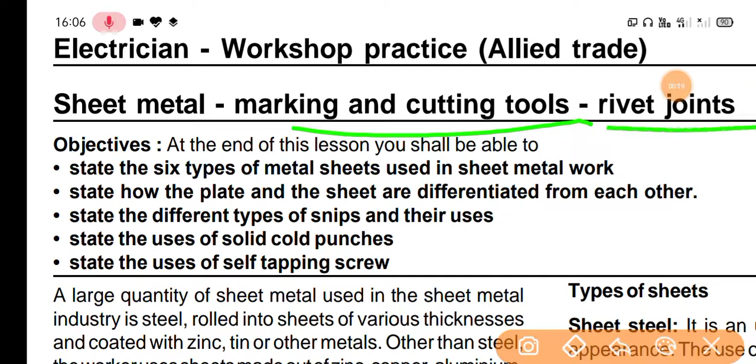A large quantity of sheet metal is used in the sheet metal industry. Steel is rolled into sheets of various thickness and coated with zinc, tin or other metals. Other than steel, the worker uses sheets made of zinc, copper, aluminum, stainless steel, etc.

The term sheet metal generally applies to metals and alloys in sheet rolled into various thicknesses less than 5 mm. Sheets over 5 mm thick are called plates.

Earlier, sheets were specified by standard wire gauge numbers. Each gauge is designated with a definite thickness, as shown in Table 1. The larger the gauge number,

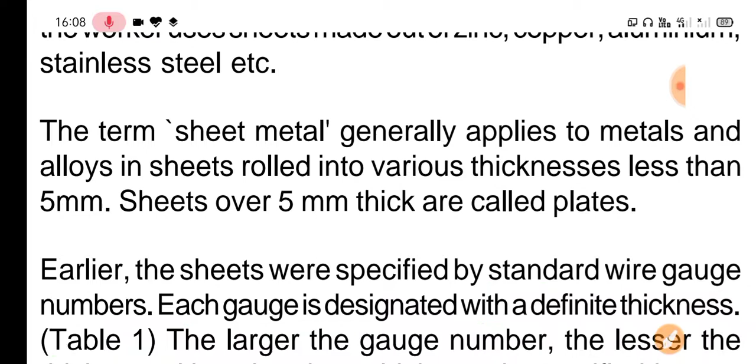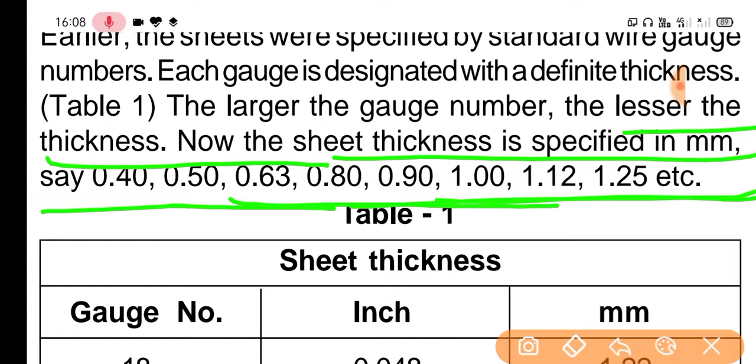the lesser the thickness. Now sheet thickness is specified in mm, for example 0.40, 0.50, 0.63, 0.80, 0.90, 1.00, 1.12, 1.25, etc.

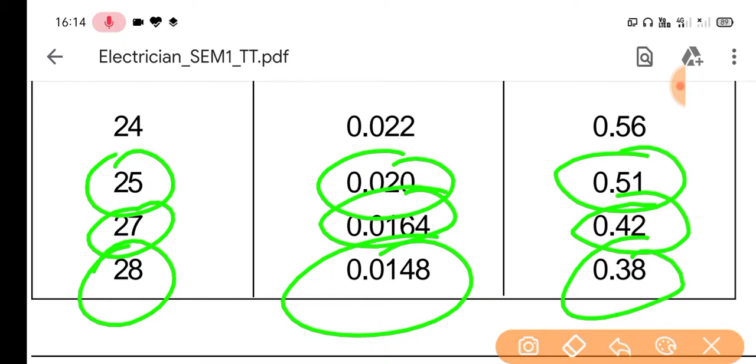Sheet steel is uncoated sheet with a bluish-black appearance. The use of this metal is limited to articles that are to be painted or enameled.

Galvanized iron sheet: the zinc coated iron sheet is known as galvanized iron sheet, popularly known as GI sheet. The zinc coating resists rust. Articles like pans, buckets, furnaces, cabinets are made with GI sheet.

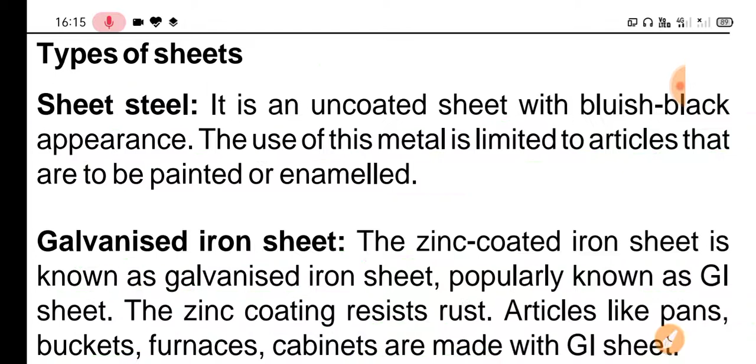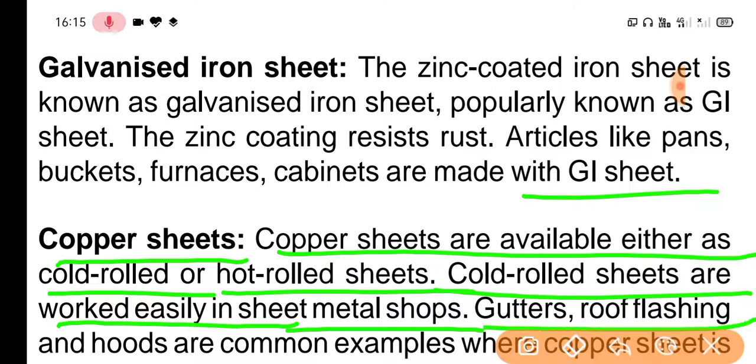Copper sheets are available either as cold rolled or hot rolled sheet. Cold rolled sheets are worked easily in sheet metal shops. Gutters, roof flashings and hoods are common examples where copper sheet is used.

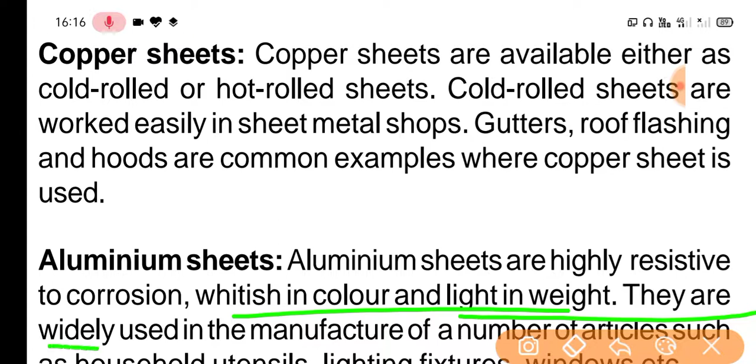Aluminum sheets are highly resistant to corrosion, whitish in color and light in weight. They are widely used in the manufacture of a number of articles such as household utensils, lighting fixtures, windows, etc.

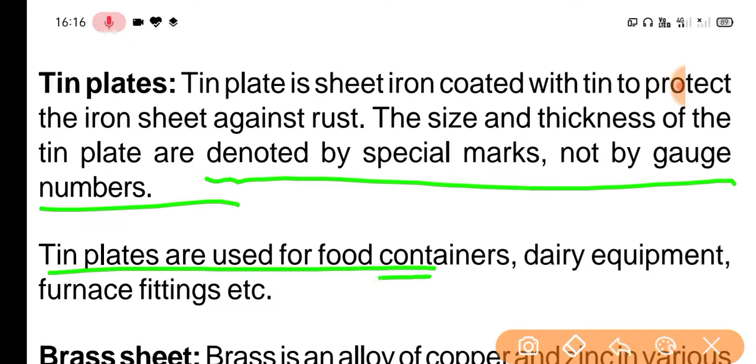Tin plate: the tin plate is sheet iron coated with tin to protect the iron sheet against rust. The size and thickness of the tin plate are denoted by special marks, not by gauge numbers. Tin plates are used for food containers, dairy equipment, furnace fittings, etc.

Brass sheet is an alloy of copper and zinc in various proportions. It will not corrode and is extensively used in craft.

A snip is a cutting tool used for cutting thin sheets of metal. There are two types of snip: straight snips and bent snips.

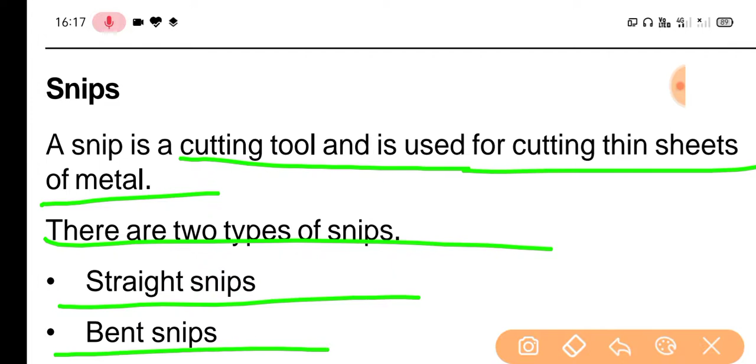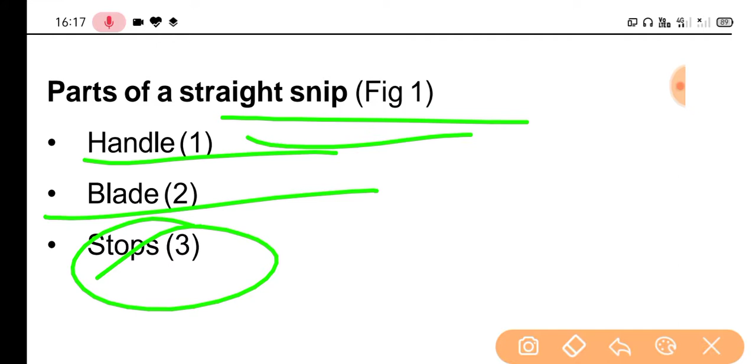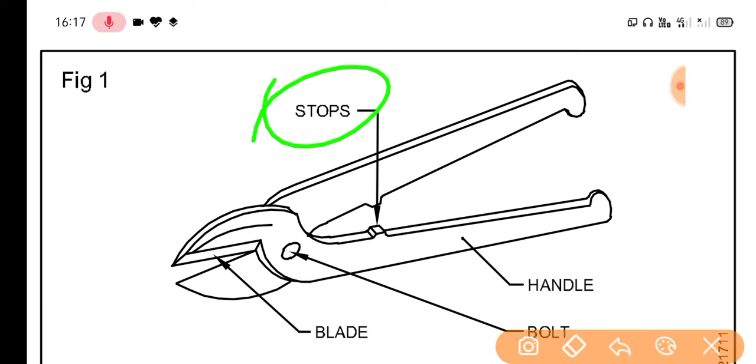Parts of a straight snip: handle, blades, and stop. First the handle, second the blade, and third the stop. As shown in these pictures: the stop part, the blades part, the handle part, and the bolt part.

A straight snip has straight blades for straight line cutting. It can also be used for external curve cuts. As shown in the pictures, this is a straight snip, used for external curve cuts.

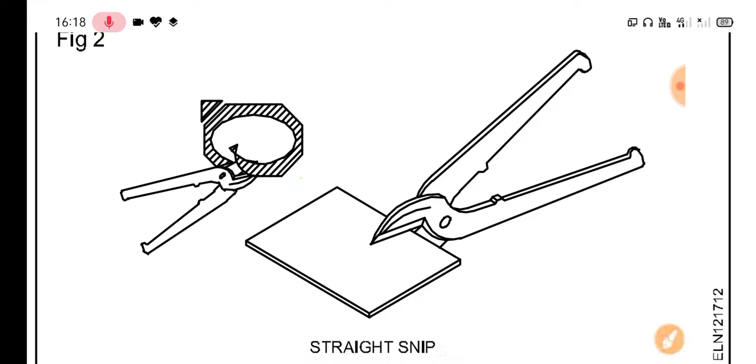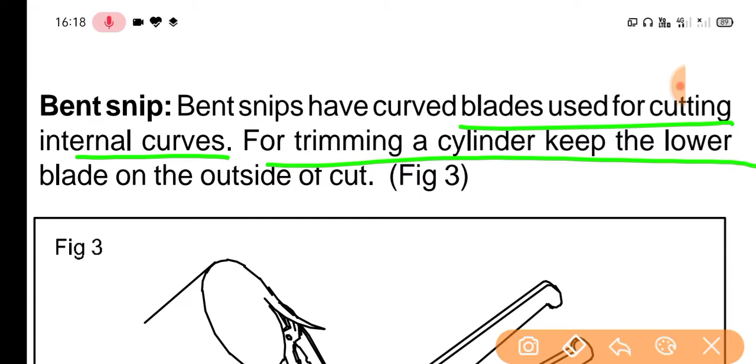A bent snip has curved blades used for cutting internal curves. For trimming a cylinder, keep the lower blade on the outside of the cut. This is the bent snip.

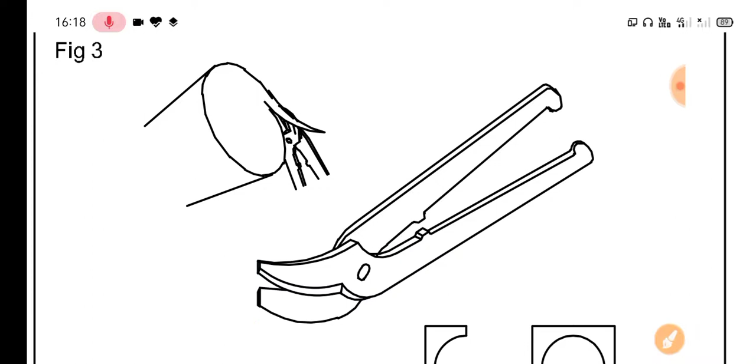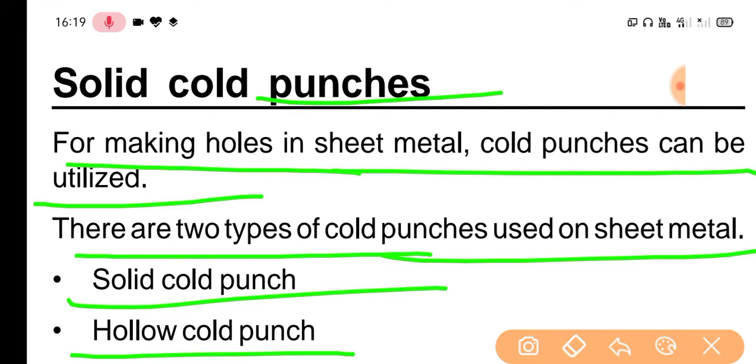Solid punch, or solid cold punch, is used for making holes in sheet metal. Cold punches can be utilized in two types: solid cold punch and hollow cold punch. In this lesson, you learn about solid cold punches.

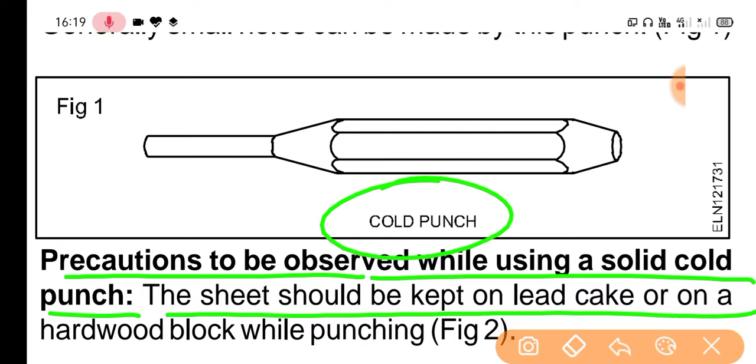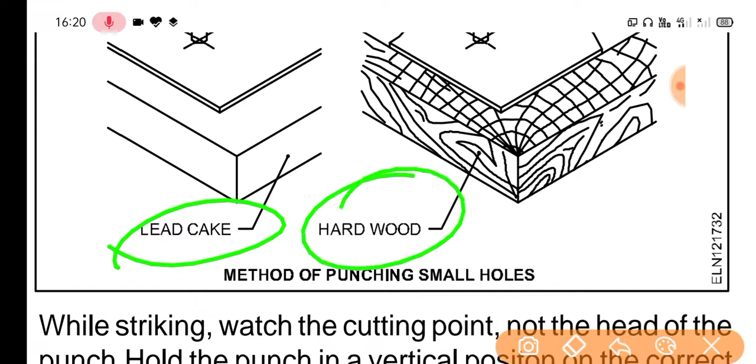Self-tapping screw: a self-tapping screw is used in assembly where thin section metal sheets are used. Joints made using these screws are vibration resistant and can be assembled and dismantled many times.

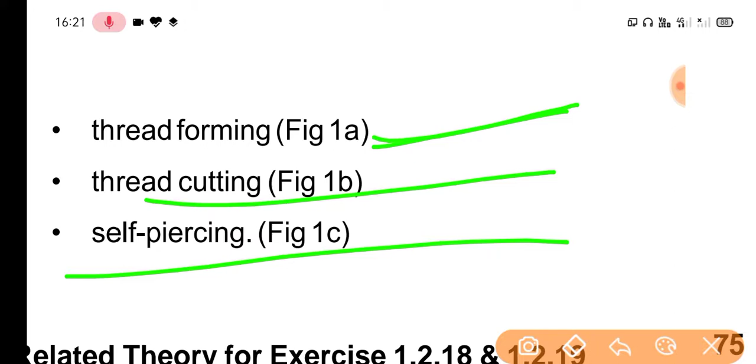Since these screws cut thread in mild steel and soft metal, they are called self-tapping screws. The thread forming type produces the mating thread by displacing the material. These are useful for softer and thinner materials.

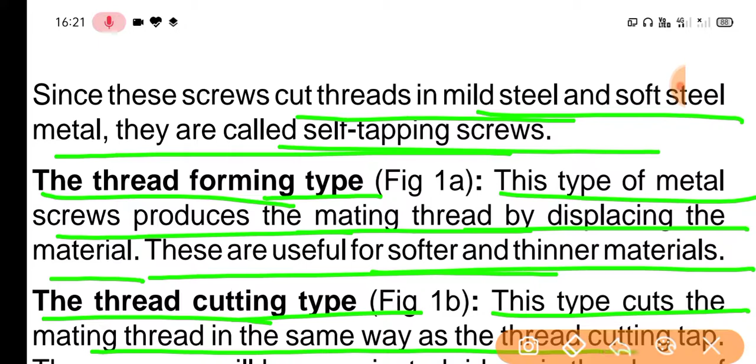The thread cutting type cuts the mating thread in the same way as thread cutting taps. These screws have projecting ridges in the shape of a thread for cutting action. These are quite useful for self-tapping on hard or brittle materials with thin wall sections.

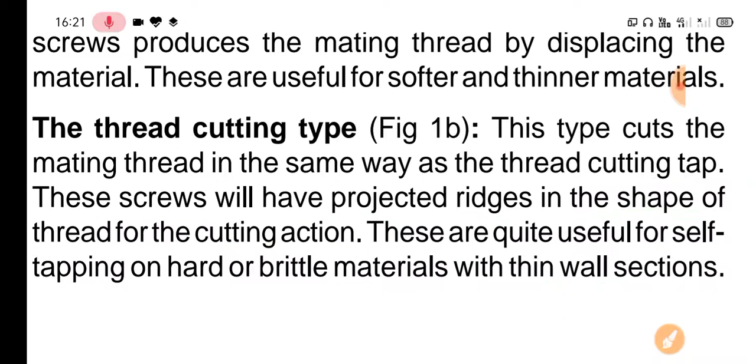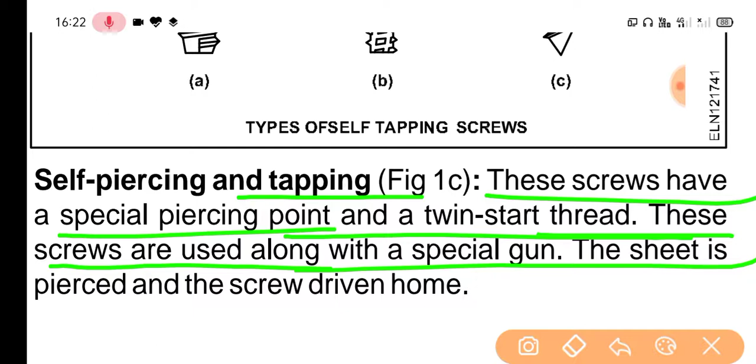As shown in the pictures, this is a self-tapping screw, and this is self-piercing and tapping. These screws have a special piercing point and a twin start thread. These screws are used along with a special gun. The sheet is pierced and the screw is driven home.

Folding tools. The common tools used for the folding of sheet metal are: angle steel and folding bar, C clamp, stakes, and mallet. Angle steel: two pieces of angle are used for folding at 90 degrees. For longer sheets, long angles will be used along with a clamp or hand vise.

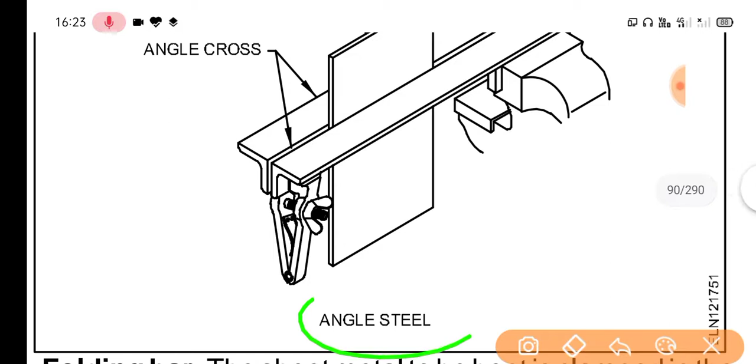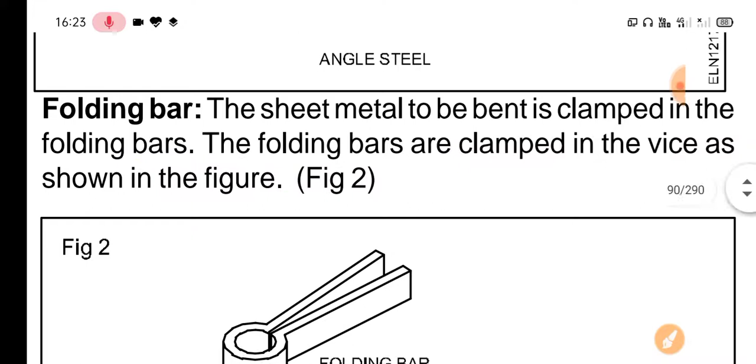Picture 1. This is the angle cross, angle steel, and folding bar. The sheet metal to be bent is clamped in the folding bars. The folding bars are clamped in the vise as shown in picture 2. This is a folding bar.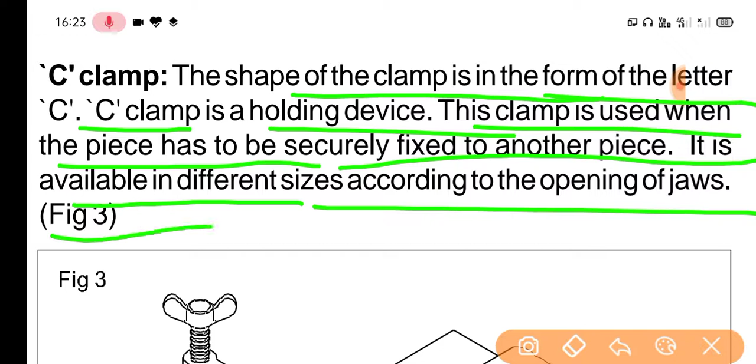C clamp. The shape of the clamp is in the form of the letter C. A C clamp is a holding device. This clamp is used when a piece has to be securely fixed to another piece. It is available in different sizes according to the opening of the jaw. Picture 3. This is a C clamp.

Yeah, G cramps. Holding two metals and connecting the two metals and bending with the hammer.

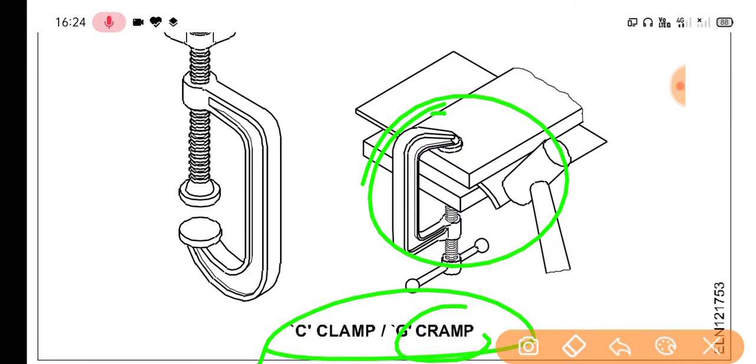Stakes are used for bending, seaming and forming of sheet metal that cannot be done on any regular machine. For the above purpose, different stakes are used. Stakes are made of forged steel or cast steel. Types of stakes: hatchet stake, square stake, blowhorn stake, bevel edge square stake.

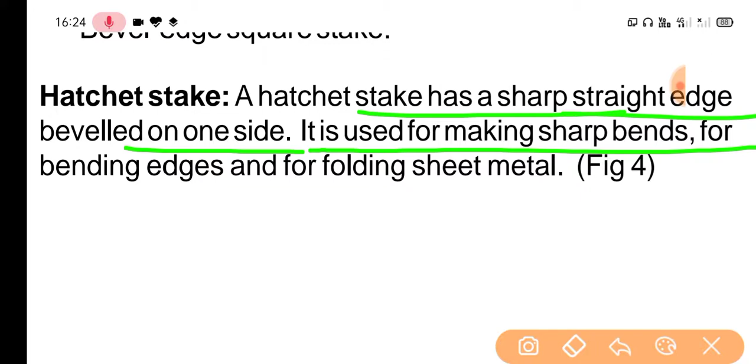A hatchet stake has a sharp straight edge beveled on one side. It is used for making sharp bends, for bending edges and for folding sheet metal. Picture: this is a hatchet stake.

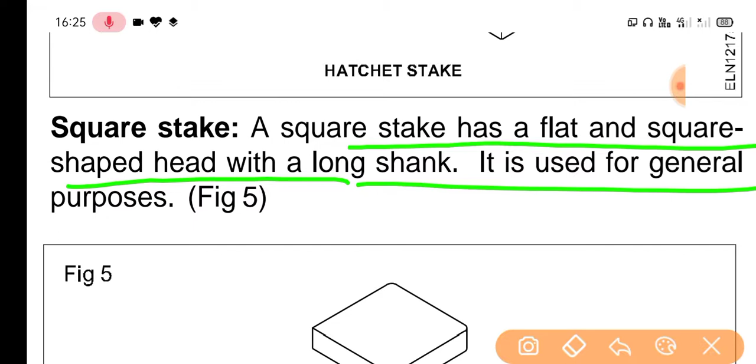A square stake has a flat, square-shaped head with a long shank. It is used for general purposes. Picture 5. This is a square stake.

Blowhorn stake: it has a short tapered horn at one end and a long tapered horn at the other end. It is used in forming, riveting or seaming tapered cone-shaped articles such as funnels, etc.

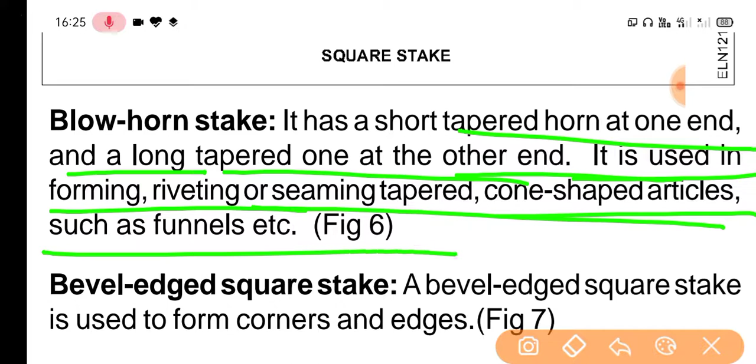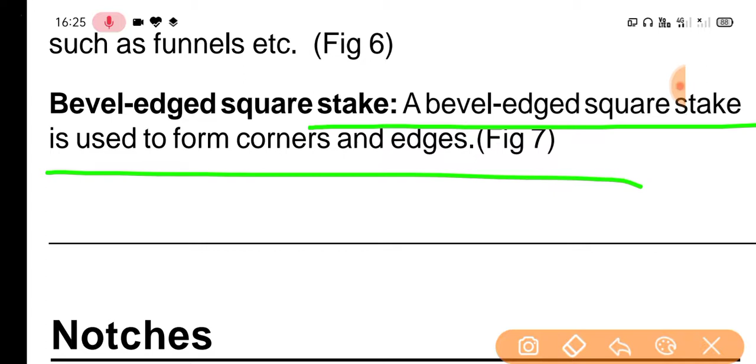Bevel edge square stake. A bevel edge square stake is used to form corners and edges. Picture 7. This is a blowhorn stake, and this is the bevel edge square stake.

This is a mallet. A mallet is used for working on sheet metal. It will not damage the sheet surface while working. Mallets are made of wood, rubber, copper, etc. Picture 8. These are mallets made of rubber and copper. Use of mallets.

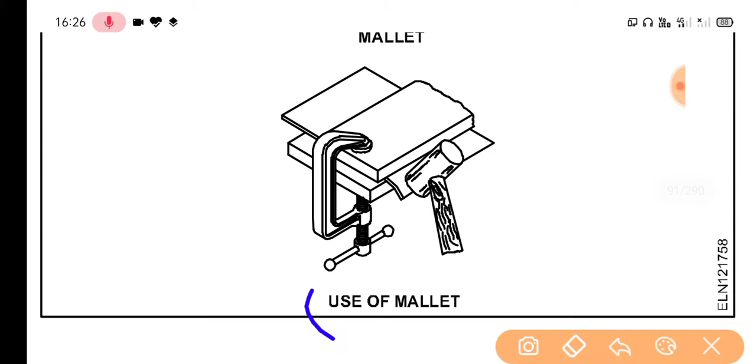Notches are the spaces provided for joining the edges when sheet metals are cut from the layout. This is a V notch, and these are the bending lines. The purpose of notches is to prevent excess material from overlapping and causing a bulge at the seam and edge, and to allow the work to be formed to the required size and shape.

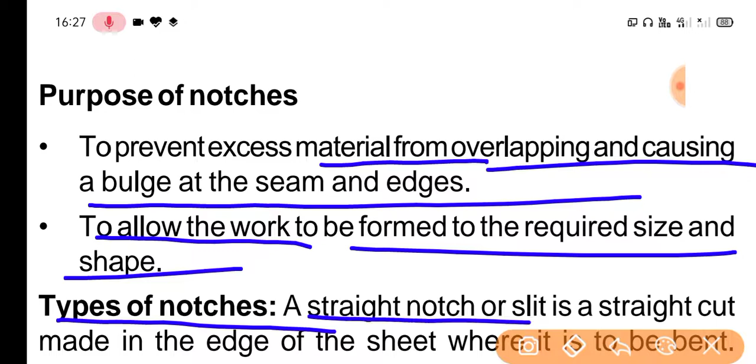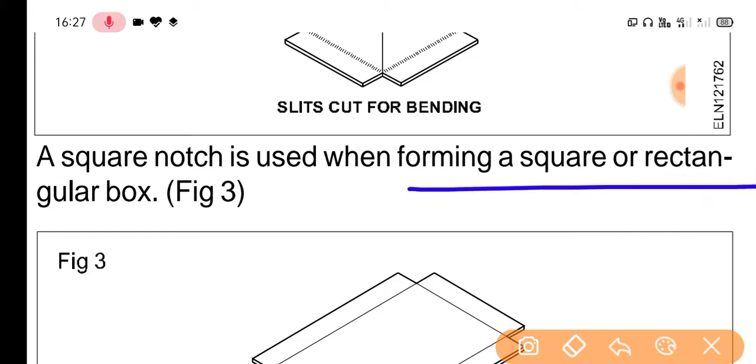Types of notches: straight notches or slits. A straight cut is made in the edge of the sheet where it is to bend. Picture 2. This is the sheet bent to a square using a straight notch, and this is the sheet cut for bending. A square notch is used when forming a square or rectangular box. Picture 3. A square notch cut, and this is a sheet bent to shape using a square notch.

A slant notch is a cut at an angle of 45° to the corner of the sheet. It is used when a single hem meets at a right angle. A notch cut after marking at 45° and bent to shape using a slant notch.

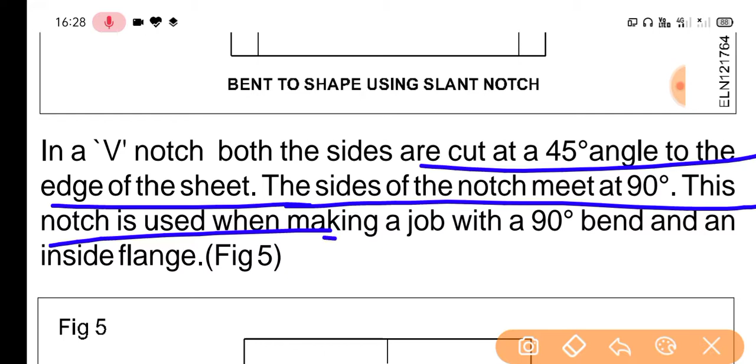V notch: the sides are cut at a 45° angle to the edge of the sheet. The sides of the notch meet at 90°. This notch is used when making a job with a 90° bend and inside flange. Picture 5. This is a V notch marked and cut. This is a 45° mark and cut, and this is a bend using a V notch.

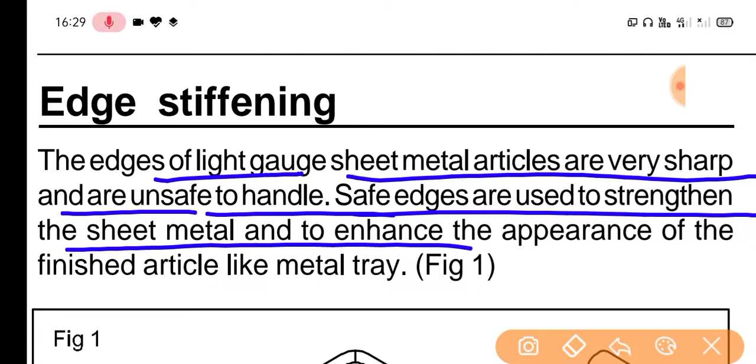Edge stiffening. The edges of light gauge sheet metal articles are very sharp and unsafe to handle. Safe edges are used to strengthen the sheet metal and to enhance the appearance of the finished article, like a metal tray. Picture 1. This is detail X, and the metal tray.

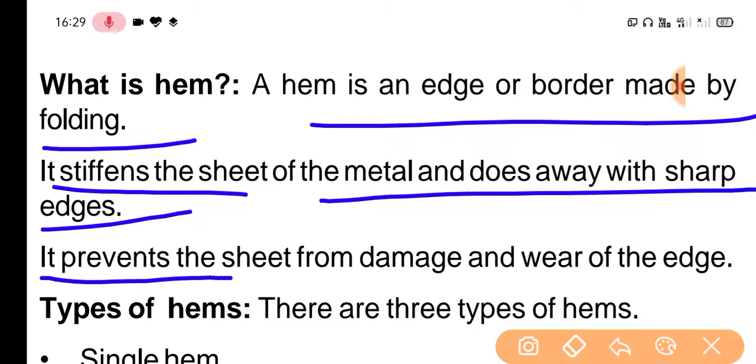What is a hem? A hem is a border made by folding. It stiffens the sheet metal and does away with the sharp edge. It prevents the sheet from damage and wear of the edge. Types of hems: there are three types: single hem, double hem, and wired edge.

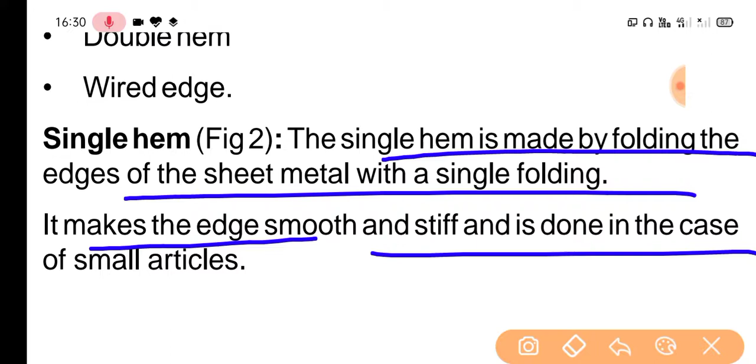Single hem: a single hem is made by folding the edge of the sheet metal with a single fold. It makes the edge smooth and stiff. It is done in the case of small articles. Picture: this is a single hem and this is a double hem.

Double hem: a double hem is made by folding the edge over twice to make it smooth, and this is normally done to strengthen the edges of lengthy articles.

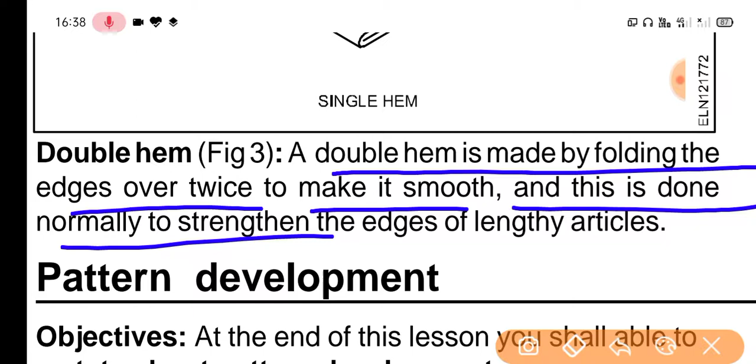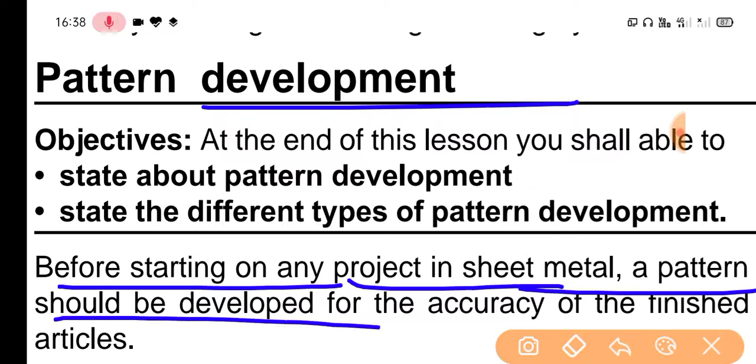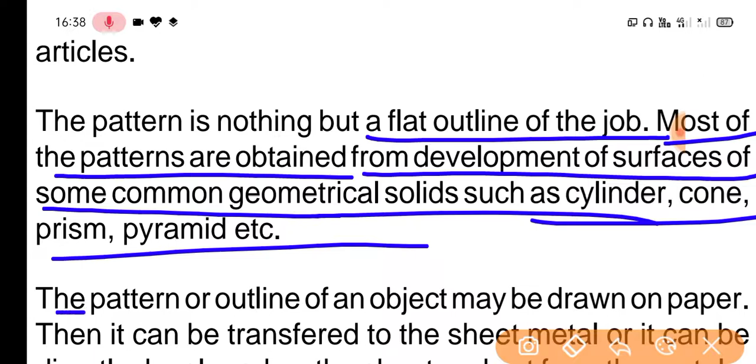Pattern development: before starting on a project in sheet metal, a pattern should be developed for the accuracy of the finished articles. The pattern is nothing but a flat outline of the job. Most of the patterns are obtained from development of surfaces of some common geometrical solids such as cylinder, cone, prism, pyramid, etc. The pattern outline of an object may be drawn on paper. Then it can be transferred to the sheet metal. Or it can be directly developed on the sheet and cut from the metal.

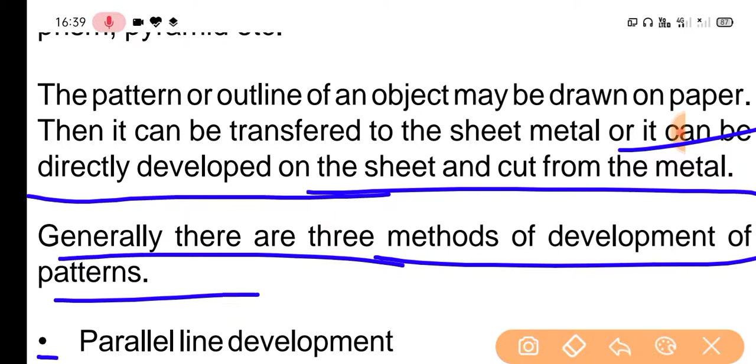Generally, there are three methods of development of patterns: parallel line development, radial development, and the triangulation method of pattern development. There are three methods in general use. The class of geometrical form of the object to be made must be taken into account when deciding which method is to be used. Parallel line method: this method is used to develop patterns for shapes like boxes, prisms, and cylinders.

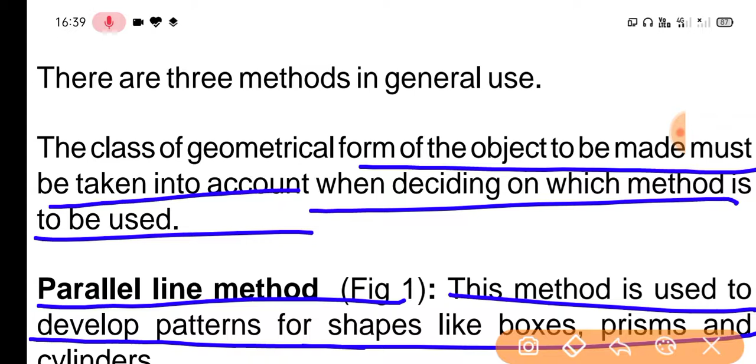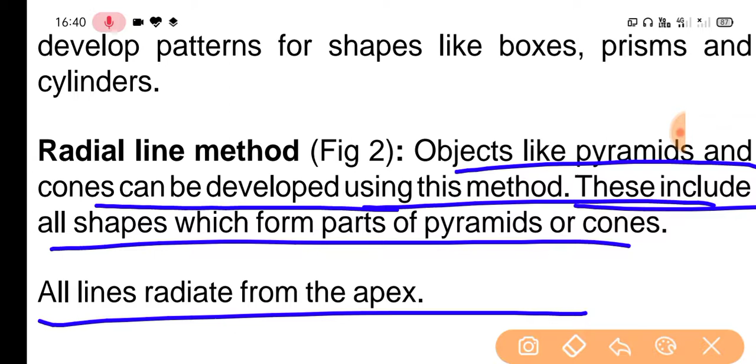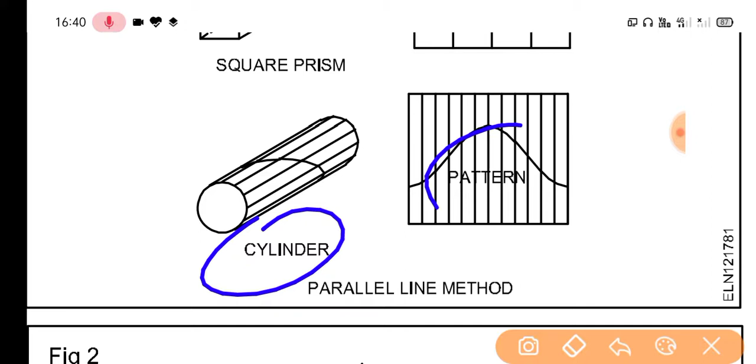Radial line method: objects like pyramids and cones can be developed using this method. This includes all shapes which form parts of pyramids or cones. All lines radiate from the apex. Given in picture 1, a square prism and its pattern, and this is the cylindrical pattern. Parallel line methods, and this is a cone cut obliquely, and cutting line patterns, and radial methods.

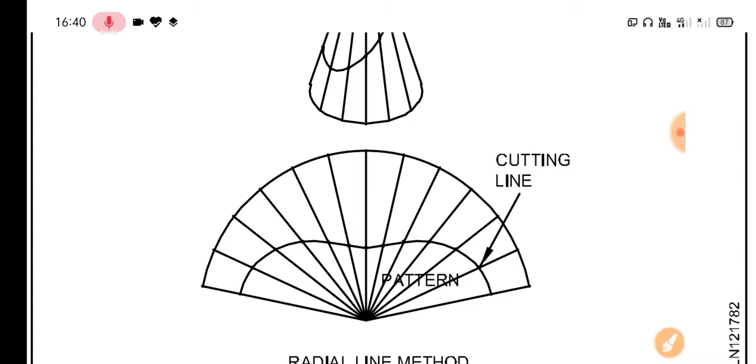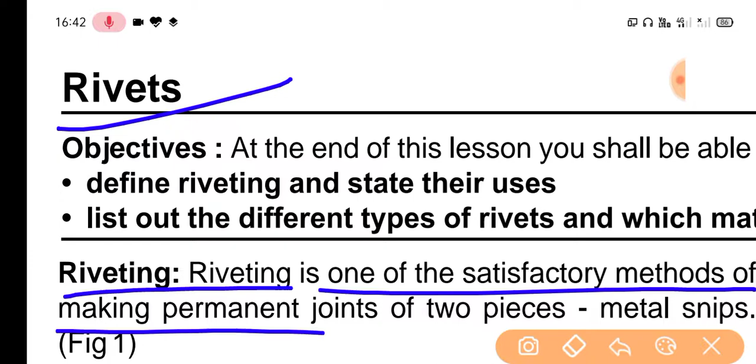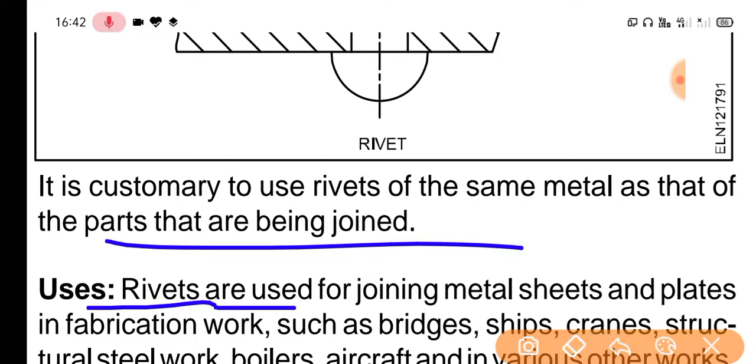What is a rivet? Riveting is one of the satisfactory methods of making permanent joints of two pieces of metal. Picture 1 shows that this is a rivet. It is customary to use rivets of the same metal as that of the parts that are being joined. Uses: rivets are used for joining metal sheets and plates in fabrication work such as bridges, ships, cranes, structural steel work, boilers, aircraft, and in various other work.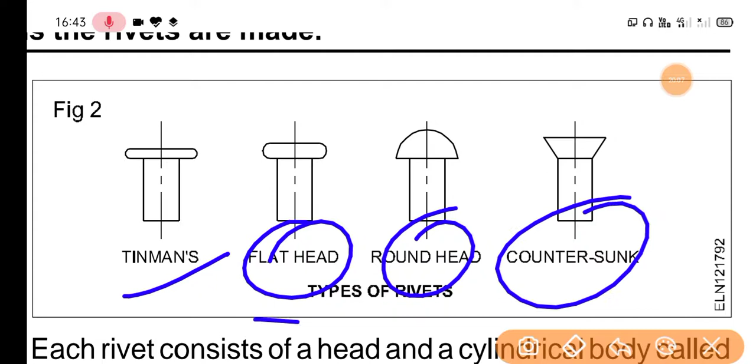Material in riveting: the rivets are secured by deforming the shank to form the head. These are made of ductile materials like low carbon steel, brass, copper, and aluminium. Types of rivets: the most common types of rivets are tinman's rivets, flat head rivets, round head rivets, and countersunk head rivets. Given in picture 2, this is a tinman's, flat head, round head, and countersunk type of rivet, and each rivet consists of a head and a cylindrical body called a shank.

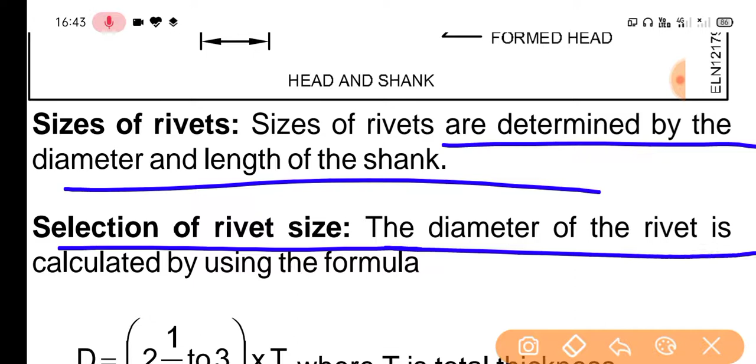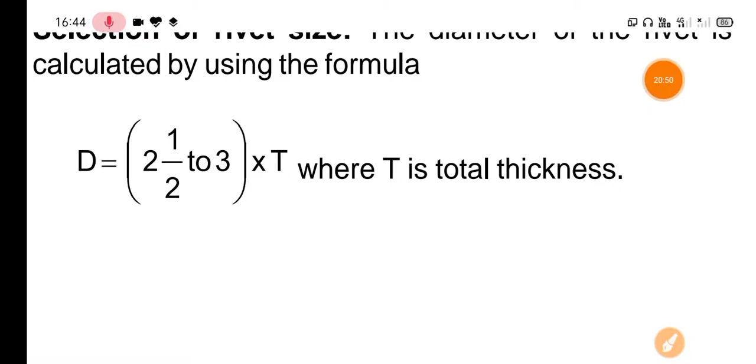This is the head, this is the shank, this is the length, and this is the diameter. This is the formed head and shank. Sizes of rivets are determined by the diameter and length of shank. Selection of rivet size: the diameter of the rivet is calculated by using the formula D = 2 1/2 to 3 × T, where T is total thickness. The shank length is given by L = 2T + 1 1/2 D, where T is the sheet thickness and D is the diameter of the rivet.

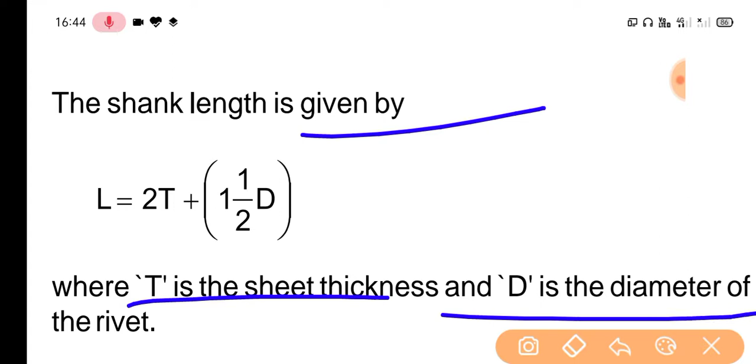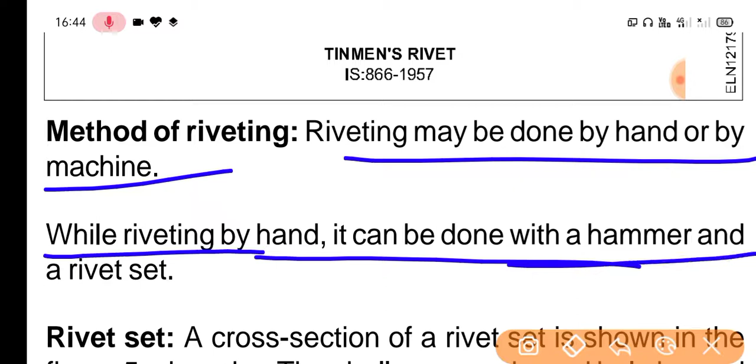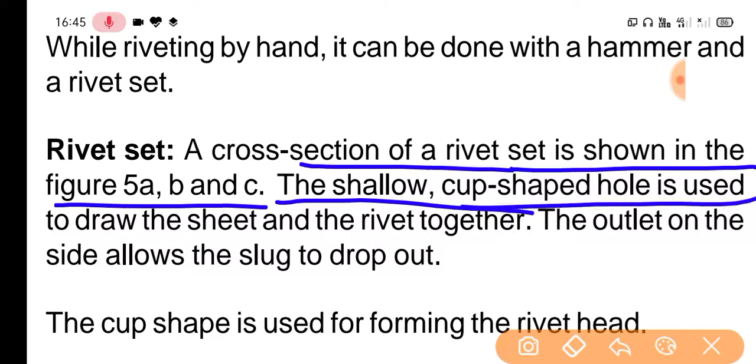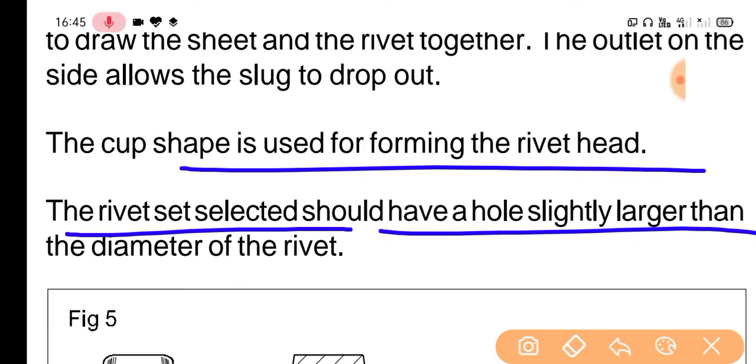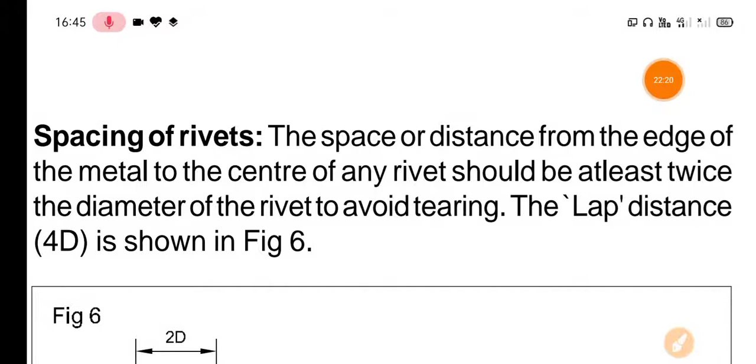Spacing of rivets: the distance from the edge of the metal to the center of any rivet should be equal to twice the diameter of the rivet. To avoid tearing, the lap distance is 4D, as shown in picture 6. Picture 6 shows that this is 2D, this is the lap, and this is 2D. The edge distance is equal to two times the diameter of the rivet minimum. The minimum lap is 4 times the diameter of the rivet.

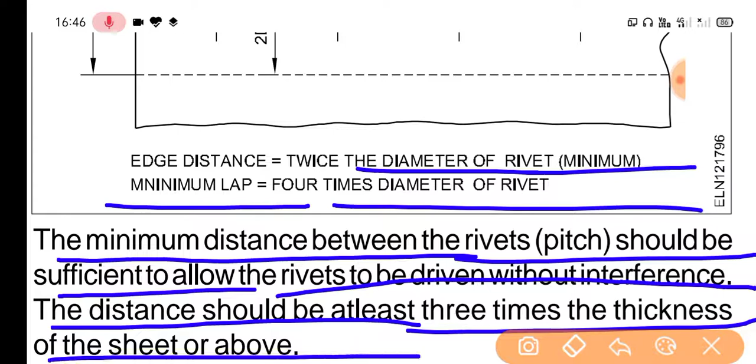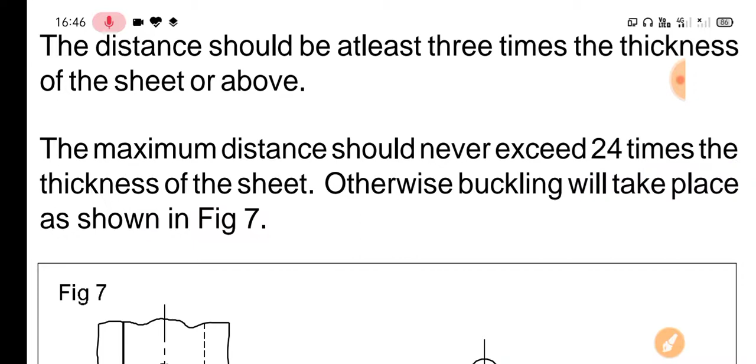The minimum distance between rivets, the pitch, should be sufficient to allow the rivet to be driven without interference. The distance should be at least 3 times the diameter of the rivet. The maximum distance should never exceed 24 times the thickness of the sheet. Otherwise, buckling will take place as shown in picture 7. This is the pitch, and this is P = 3D minimum.

Gapping: the maximum edge distance is governed by the necessity of preventing the sheets from gapping and should be limited to 10 times the thickness of the sheet or plate. And this is the pitch, P = 24T maximum, T being the thickness of metal. Buckling between rivets is caused by too great a pitch.